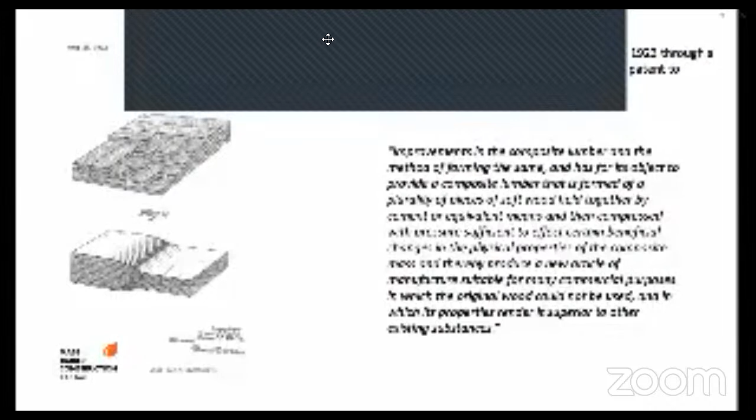But the earliest patent we've got is 1922 for this product called composite laminated timber or composite lumber. And it essentially is cross-laminated timber using smaller board pieces and compression systems to try and improve a composite of timber to make it have a higher capacity for two-way action, so that's the transverse and the longitudinal lamellas, and that then gives it its dimensional properties which are greater than a single board can give in, say, one orientation.

And so this patent is really the first semblance of mass timber, I guess, from Tacoma in Washington State in the US. But more importantly, now we define mass timber as being something more of a commercial element and part of the superstructure. And so mass timber really does replace wet pour concrete or reinforced concrete systems, and really forms the new age renewable technology superstructure.

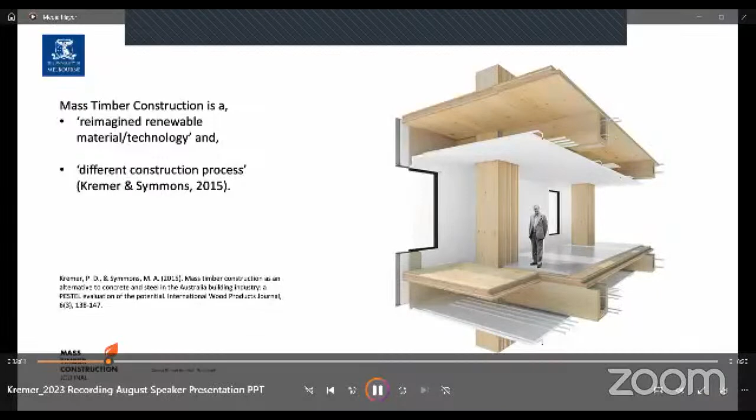And as you can see in this model here, the remainder of the building, whether it be the concrete screed on top of the CLT floor systems or the plasterboard ceilings that have a plenum area and look to have some sort of post-tension beam system running through them, and timber columns, this is representative of what mass timber looks like in modern technology.

And it's important to remember it's not just the material type, it's also the process. The process of prefabrication is what gives mass timber its competitive cost advantage and time and speed advantage edge. In terms of the material, its lightweight, its stiffness, and its strength capacity differential based on the dimensional depth of the material is another reason why you would use it. And it's lightweight. It's a quarter of the weight of, 20% of the weight of concrete.

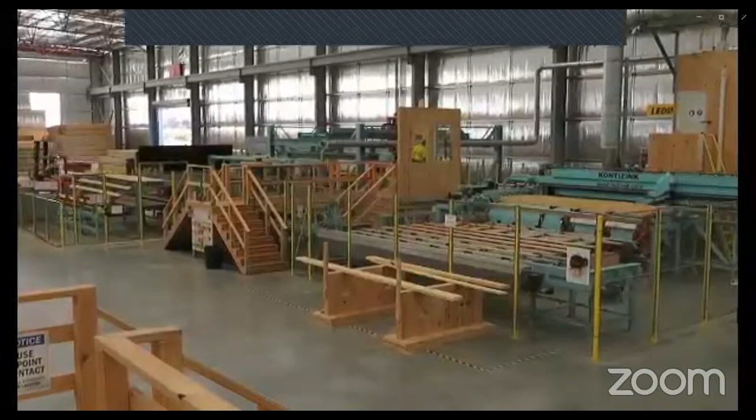So how is it made? Well, let's have a look at a short video and see exactly how it's made. This is a video of the XLAM factory, and I'm going to narrate or talk over the top for you. So this is the XLAM fully automated press, and what you'll actually see is the boards coming in. They're laid up on this like a deck to be able to allow the boards to get sorted into individual items, and they get tested for moisture control.

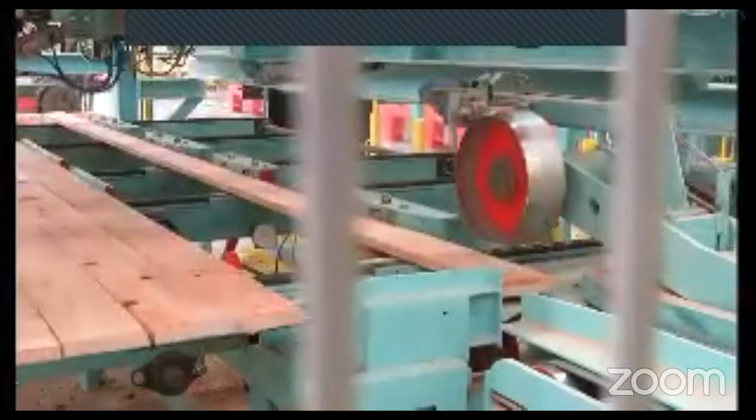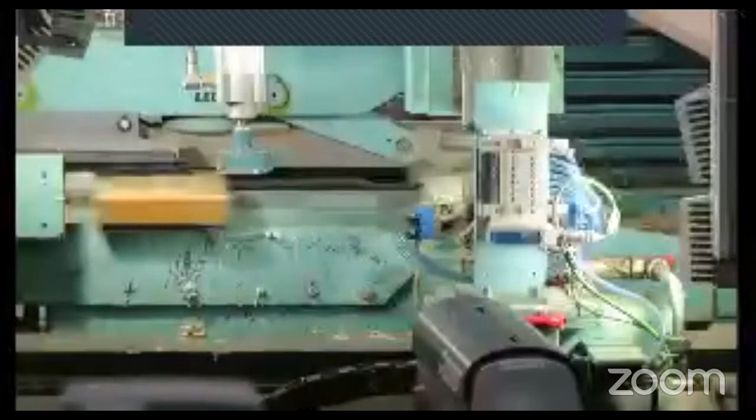So we want to make sure that we have the right moisture content in the boards to be able to allow them to go through the process without an issue. This is finger jointing one end of the boards so that we can actually create a continuous length, and the Kontizink here not only feeds the boards in continuously, it runs a finger joint through, and in a moment you'll see the glue being applied to the end of the finger joints right here. And that means that we're actually able to join continuously all the boards.

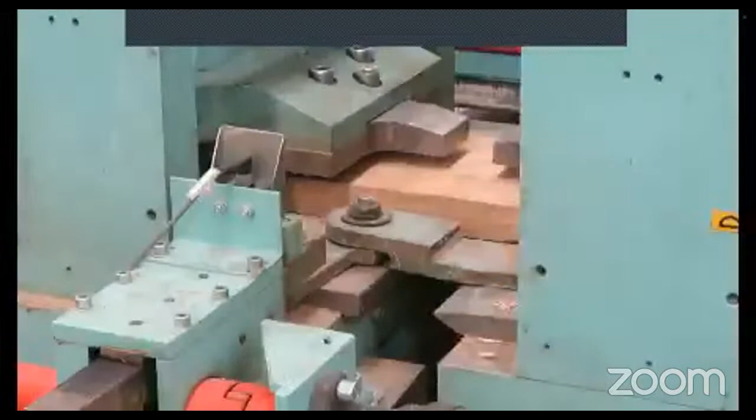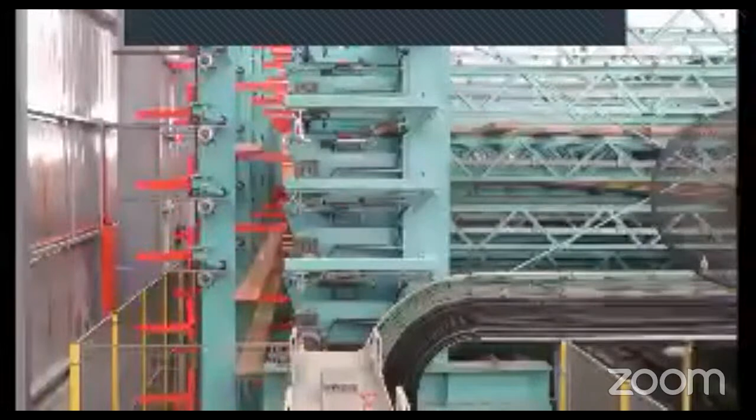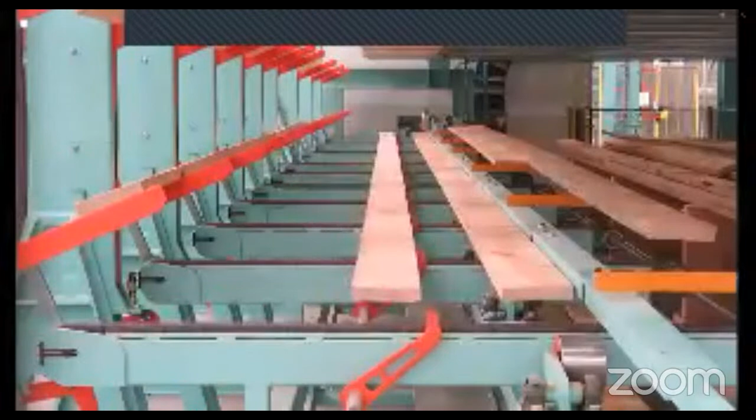Some will become long boards for the length of the billet, and some will become the cross boards, which is for the transverse lamella. It goes through the system until it has enough curing time for that glue, and then it will actually go into a planing and almost like a finishing type room to make sure that the dimensional depth and width is appropriate for the type of billet. So any variability in the boards effectively gets planed out and they get machined down to the right size.

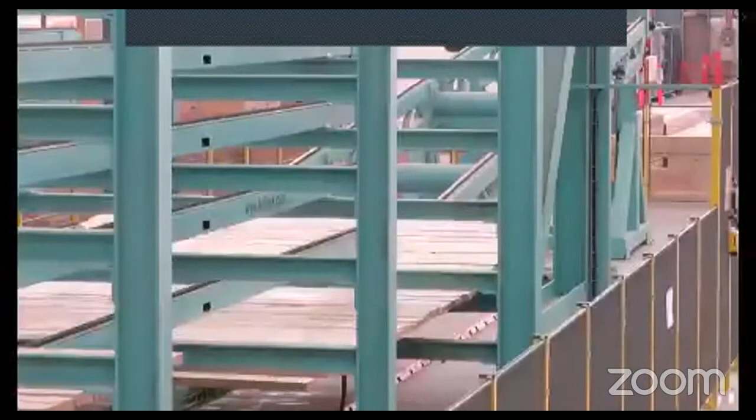Once they're machined, they get cut into lengths that are required for both that longitudinal and transverse. Here you can see the short boards, so these are the cross boards that are being loaded onto a conveyor system in an array so that they can get picked up by a vacuum lifter and put down onto the pressing bed, which is where they will be glued together before they end up in their final resting place in the press. The boards are now traversing along.

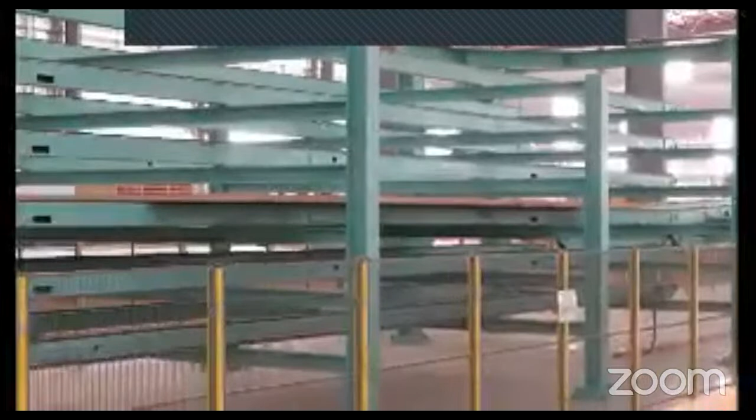The cross boards come down onto the bed, and you can see that happening here. These will go on top of longitudinal boards which already exist on the plastic tray. As you can see now, we've got the first set of boards being picked up. The white centerpiece is actually the bed that they will be laid down on.

And these vacuum lifters are very good at placing these boards on in a good way. The whole table now will move so that the glue can be put on it. Now the next layer comes on and it goes on top of it. And you're always going to have odd numbers of layers. Now it'll go back through the glue machine, which is where those purple lights are. You can see it here, the glue being applied.

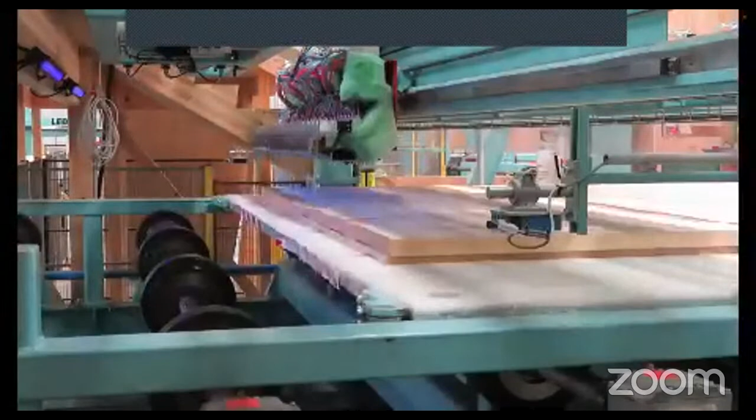And there's two boards on there, and they're two different thicknesses. And at the moment, the short boards are on the outside. So that tells me that this is a column orientation for this particular panel, not a floor plate. They then go into the press, and the press creates the pressure that's required to be able to make sure the panel stays together.

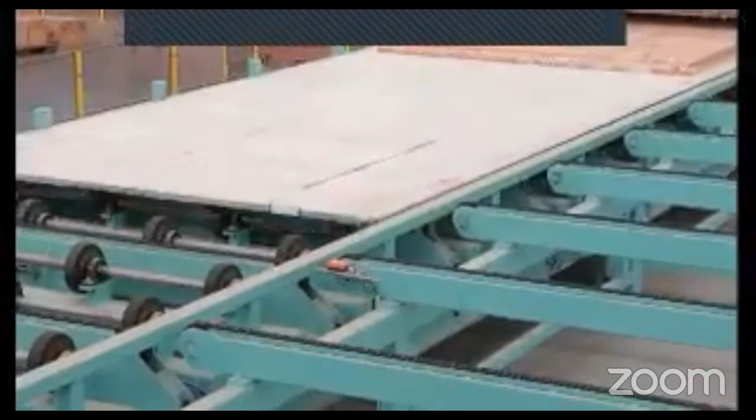And here it comes, the panel out of the press. So it's had its curing time. It cures outside the press, and it also cures under pressure in the press. And you can see the glue has foamed up now. That's because it's reacting with the moisture in the timber. So the moisture in the timber is required to be able to work efficiently to make the glue set off.

Here again, it goes into the press. This is the next billet, and it will now compress down and ensure that the whole billet comes out. And that's the end of the video for this particular bit.

Let's have a look at what it's like to have detailed design around those panels that you just saw being made. Now the first part is a digital design. To take that product that we've just produced into ordinary panels, we need to make sure we arrange them in the right way. You can arrange them through a number of different perspectives. So the first one is that you can use Revit to do an architectural space and place model.

But more often than not, Dlubal or Tekla are the next elements for the engineering analysis to make sure that we've got all of the right engineering properties for the building structure itself, to avoid catastrophic failure, to ensure diaphragm, to ensure we've got load transfers, etc. And all of that's done in Dlubal. We have this interoperability aspect where we can take what's called an IFC and change it from one program and put it into another program.

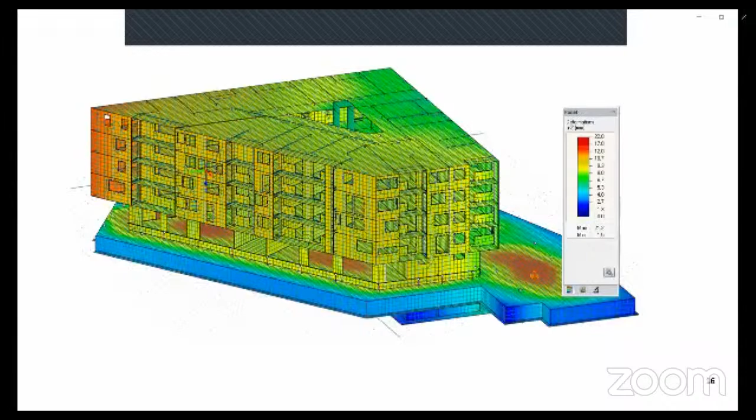And here you can see that there's deformation stresses being put on the building, and so the red is a higher level and the light green is a lower level. And the software is able to be interoperable, so we can take it from Revit Autodesk straight into Dlubal and then back into Revit Autodesk.

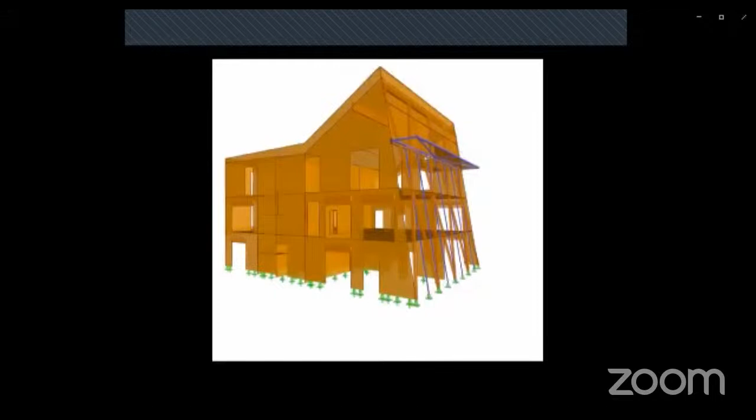And so to give you a practical example of how this comes together, we're going to look at this particular model. And this model here is of a building. I'd like to say thank you to Franco Piva because he's given me this model to use in this video. And I'm going to walk you through what the model looks like when we do a fly-through. And as you can see now, we're going through the building, looking at all the individual elements. And now we've come out the other side and we've transformed the digital version into an actual building.

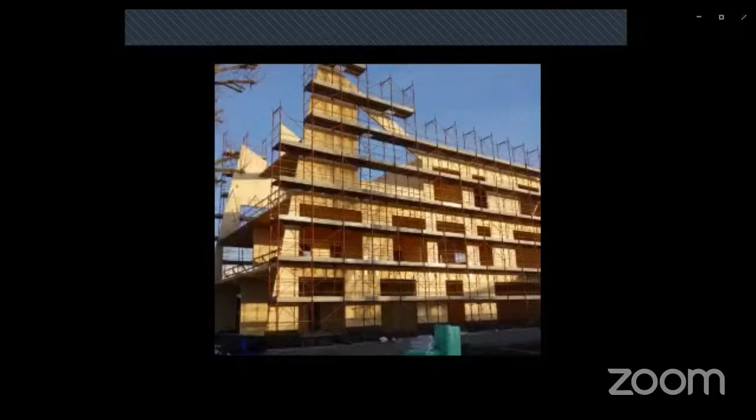And if we take those same fly-throughs with this particular building, you can see that where we had a digital technology telling us where to place the panels, those panels have now ended up on site, and that building is coming together in almost an identical way to what it was in its digital space. And you can see the final building before the cladding and the lining goes on. And here you can see the final building with the cladding going on and the windows going in.

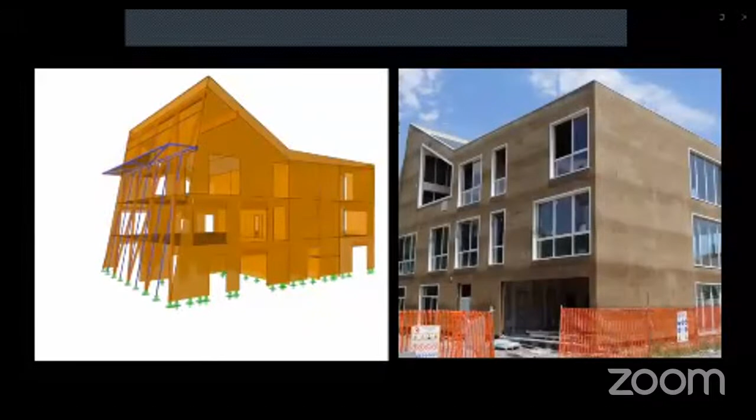And if we look at them side by side, you can see that the building looks remarkably like the digital model that we had prior to that. So it's really important to know these digital models really are the genesis for where the technology is placed when it comes to understanding how mass timber buildings come together.

And so mass timber systems can get used in very different types of buildings. And one of the buildings is in Spokane in Washington State in the US. And it's the Catalyst building, which was actually done by Katerra before Katerra unfortunately left the planet. The Catalyst building has a Revit model here.

Again, we start with that Revit model to see exactly where the place and space for all the panels will go. And then we work into more sort of detailed orientations for each of the panels that we produced. As you saw in the factory at XLAM, each of those panels has a location in a digital model.

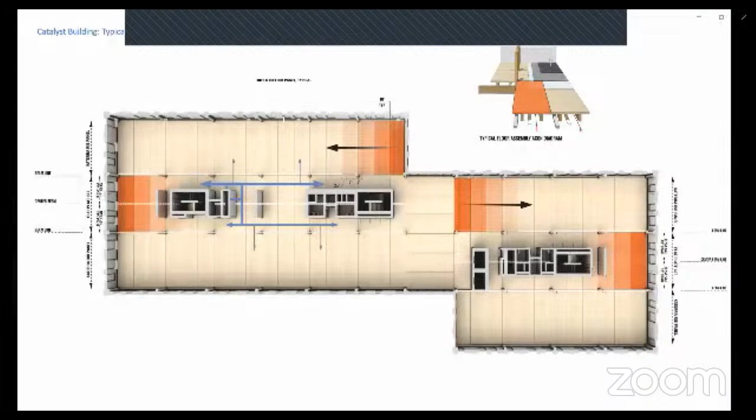That digital model then allows us to make the panels appropriate for the type of floor system or the type of wall structure system or column system. Once we have that detailed design, we can actually then do what's called a shop drawing list. The shop drawing list lists all the panels that we need to make, and this is what's sent to the factory to produce those different types of panels that you saw being produced in the video.

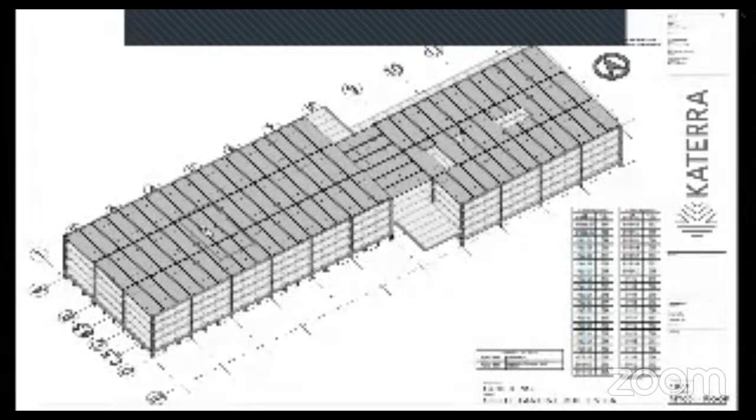And we make each one of those and we put them together in digital space. And here's that digital space. This is the column and beam structure in the green and the yellow at the top. And then we have what's called the intermediaries, which is this orangey red that's sitting in here. And so that model gives us the structural skeleton of the building, which we can then go and lay the panels onto. Now, the panels might be CLT panels, or they might be a hybrid cassette system.

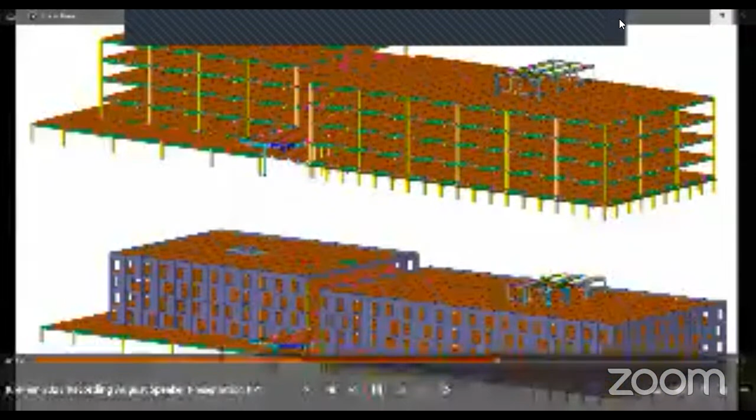And the columns may be steel, but they may be a higher grade glue laminated timber technology. And in most of these buildings, and in particular this building, the green beams are actually GLT beams, glue laminated timber beams. Once we have the whole superstructure together, you can see these purple panels. These are the facade. So this is a modular facade system which chased up the building, which means that when the building levels went up, so did the modular system. And all of that's produced in a factory.

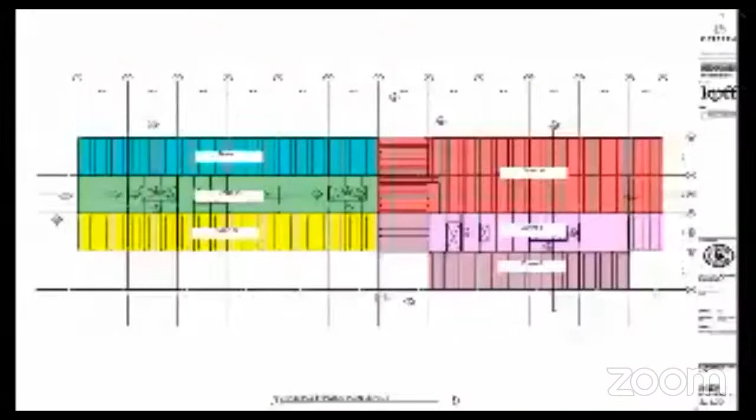And as you can see here, I mentioned before that there were glue laminated beams. Well, this also has a CLT lift core. These stair cores in the center of the Catalyst building are also CLT. Generally, you find that that's often concrete because regulations in locations like the US and Australia and Europe often don't allow that to happen unless there's a really good fire suppressing system and a building regulatory certifier that's comfortable with having CLT or mass timber cores.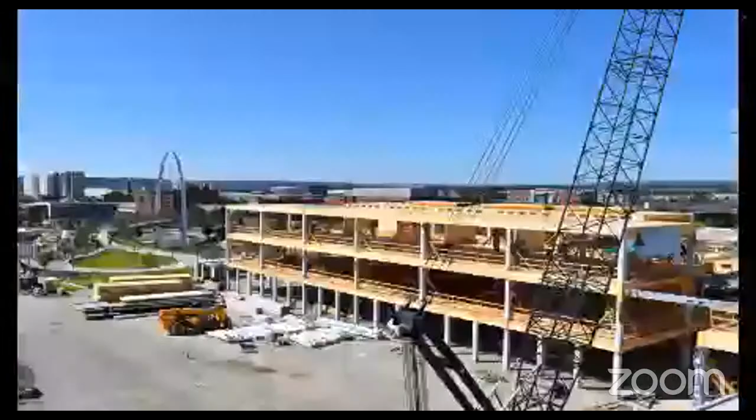It's an impressive building. And here's some under construction shots. And you may have seen these types of shots around. There's a lot of these photographs around looking at this building because it has these massive beams and these intermediary ribs and wonderful columns, and the entire building just looks amazing. Again, some more great shots with the facade system, and you'll see the facade system's actually CLT as well, and some more construction shots from a distance.

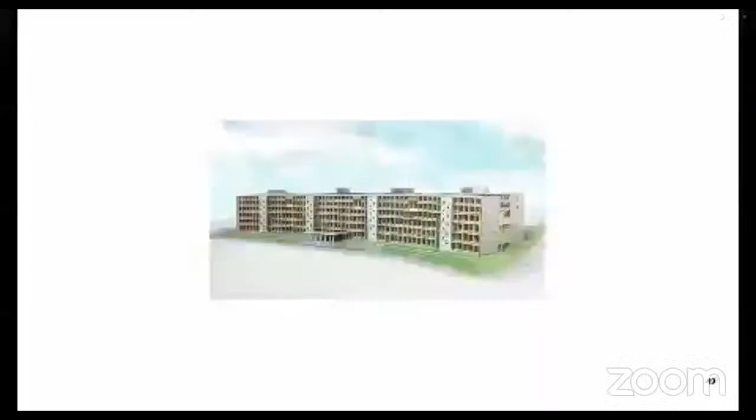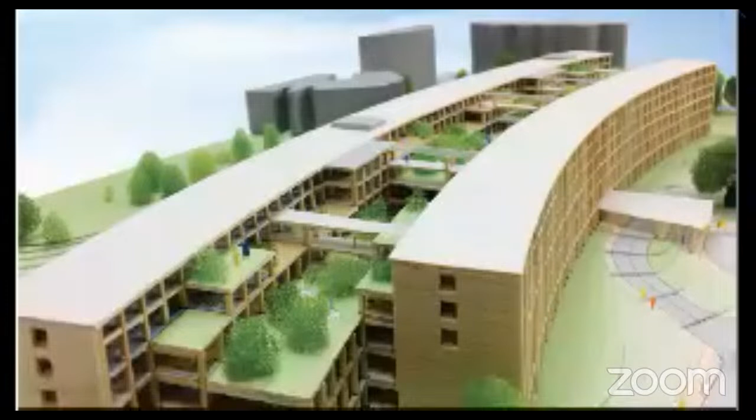This is the wooden model that was produced to verify the location and the placing of the building, and another angle is given here. Again, the systems are very large. They're these very large connection systems with amazing glulam beams and these hidden connections like Pitzl connections. And so Toyo Ito, who was the gentleman who worked on the design, had these very concealed fixing systems, and these were the size of those systems that went into the NTU.

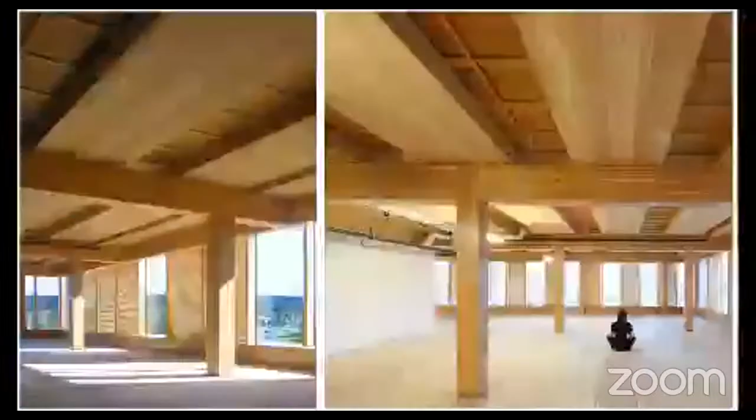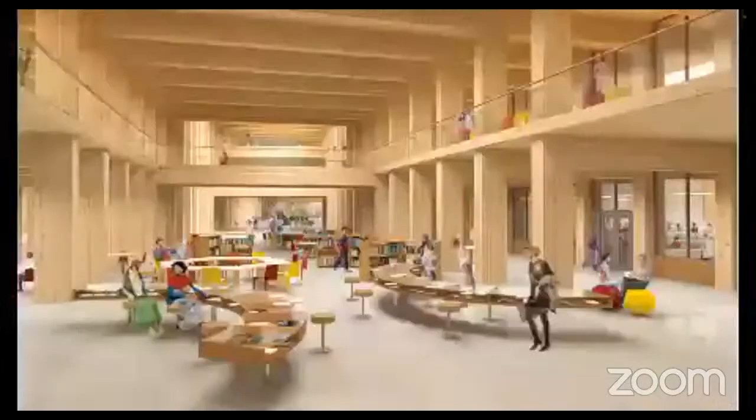And as you can see in the Catalyst building, they've used something very similar. This is using material that is in the Katerra building that you saw previously, but it follows a very similar unique design in the NTU building, and this is from the NTU building. So this building is now open, so if you do get a chance to go to Singapore and have a look at the NTU building, you will not be disappointed at all.

It's an impressive building. So that's my quick run through in sort of 20 minutes of the mass timber production, all the way from how we get the boards to be put through the machines to be able to then go into a press, and then how that panel is then situated in a digital technology, and then how that is configured to go to site. So I've actually given you from the board or the tree all the way through to the completed project in a very, very short walkthrough.

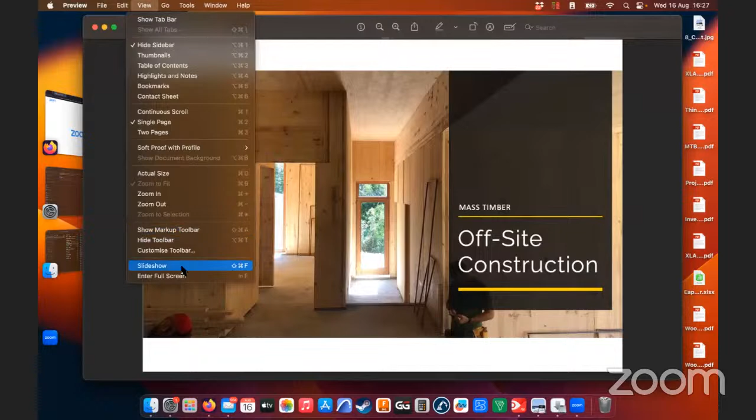Thank you. Thank you very much. Thanks for having me. I'm just going to share my screen to show our presentation. Can you see the presentation? Hello? Yes, we can. Yes, we can. Okay, that's great. I thought I was on my own for a second.

Yes, we can see. So yeah, we are a manufacturer in Cape Town, South Africa. We've been operating for about 5 years now. When we started manufacturing cross-laminated timber, we were the only manufacturer in the market. In fact, there wasn't really a market here. There were a few European companies who were trying to export stuff to South Africa and a few buildings that had gone up, but nothing that was really in an affordable range, and quite difficult to manage those projects over such a far distance.

It is possible, they do it quite often in Europe, but the market here wasn't really something that they were focusing at. So I did a trip around Europe and visited a few of the factories there, and I must say that they were very helpful and friendly in helping us to get the information that we needed. And then we decided to start manufacturing.

So my background is in architecture. I was an architect, so I did have an understanding of what the market required. And I had also managed a furniture manufacturing facility, a timber furniture manufacturing facility. So I kind of already was in the pathway for that. We initially started by building our own press.

So let's take a look through the slides that we have here. We, from the beginning, wanted to make sure that there were certain elements covered. And because we were first to market and the first manufacturer, there's a lot of hurdles or barriers to entry. The biggest barrier was the standards.

So I'm sure Nigeria has its own specific building standards and recognizes certain materials. South Africa has SABS or the SANS standards. And to build with materials which aren't in those standards is quite challenging. You get a lot of issues during your submissions to council and for approvals. So it's difficult to get it through. So the first stage that we saw was to tackle that standards. And to get a national standard in place is not an easy task.

And we actually helped one of the universities here, one of the big universities here, to push it through. There was also some backing by certain government organizations. The Department of Trade and Industry in South Africa had already identified mass timber and engineered timber as an important product, which would increase the forestry sector, which makes up 1% of our GDP.

So with the university and with these parastatal or state organizations, we managed to push the standards and get something in quite quickly. So quickly is 3 years, but we still did get something in. So South Africa now has a national standard, which is actually a copy of the Canadian and American standard. It's a clone of that.

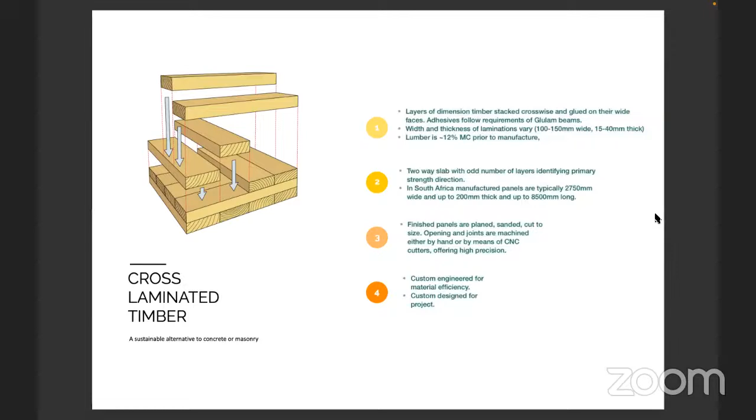There's a whole range of mass timber products: glue laminated timber, dowel laminated, LVL, parallel strand, nail laminated, all of the different ones. We specifically have focused on cross laminated timber. It is very similar to glue laminated timber in its production process up until the actual pressing. So there is the possibility to do both of these, but we specifically have just decided to focus on the cross laminated timber.

Again, this is just the standards. We had the standards in place. We got the fire certificates and testing done, and we have structural testing done. So we had to cover all of those bases with the materials. And in any new environment, these are the key things that you have to do. You have to identify the timber and start getting these standards in place. We did manufacture before we had standards, and we actually built quite a few buildings before there was a standard in place, but it just makes it that much easier once there is a standard and it is a recognized material.

Mass timber has huge potential for solving a lot of problems that are found in the construction industry. And it's not all about the timber itself, it's what the timber can do in its system. Because you are manufacturing in a factory, and to different levels in a factory, you could do just the panels, you could do full build-ups with the cladding on it, or, as we have done before, entire modular buildings which are then transported to site. So that allows you to increase your construction speed quite considerably. The material is kind of a finished material as it is. It is a structural material.

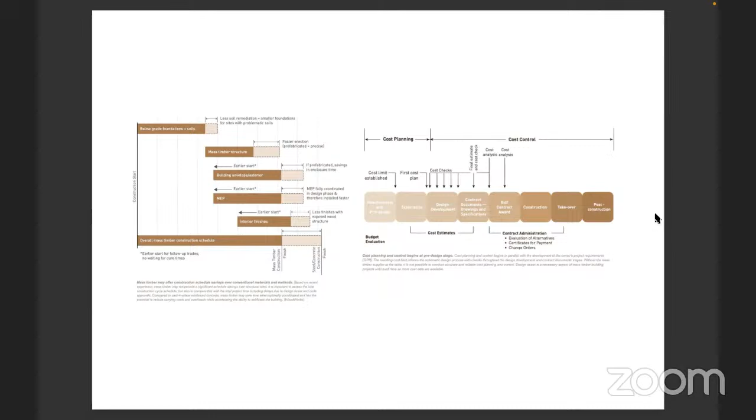So it's quite important to have that level of detail, LOD stages in a project, and to be able to look at those. Project must be frozen before it goes to the manufacturing. You don't want to start making changes while panels are in a factory.

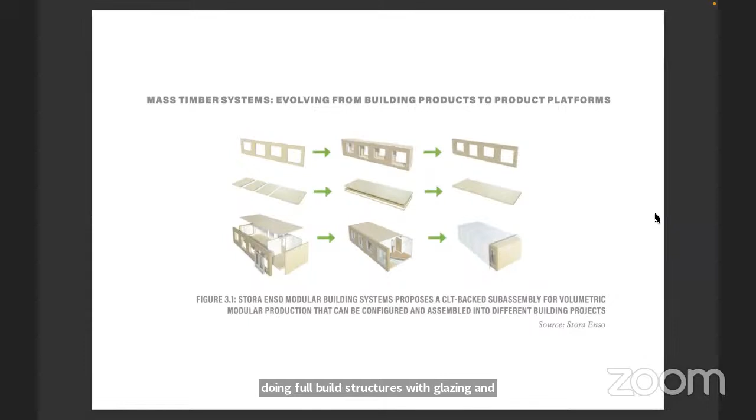Then there's different levels of development that a building could come from. This is a detail from Stora Enso showing different ways that they would do it. You can have just flat panels or panels with cutouts. These could be made up into composites, which are, say, a cross-laminated timber wall with the cladding on top of it, or to the level where you're doing full build structures with glazing and electrics and plumbing and everything incorporated. And that's kind of what you're doing in the factory at that level, you're screwing these things together and building components to different levels.

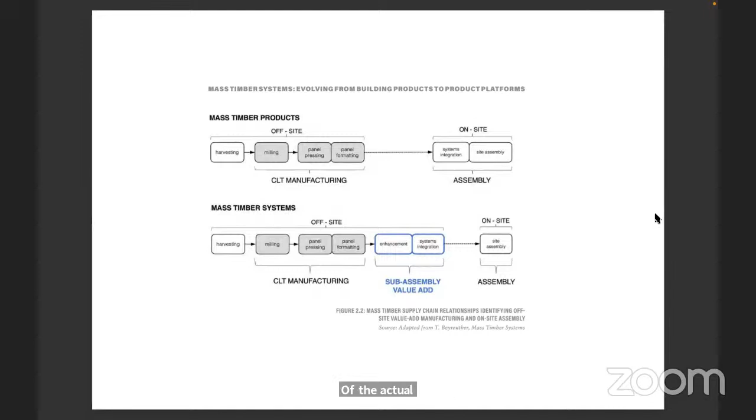So the explanation of how cross-laminated timber is made was very good in the previous presentation. I don't think we need to go too deep into that. This is just showing the different levels of the actual manufacturing. You can just be a CLT manufacturer and not do the sub-assembly value-added portion, but it does help. It's a great add-on to be able to have.

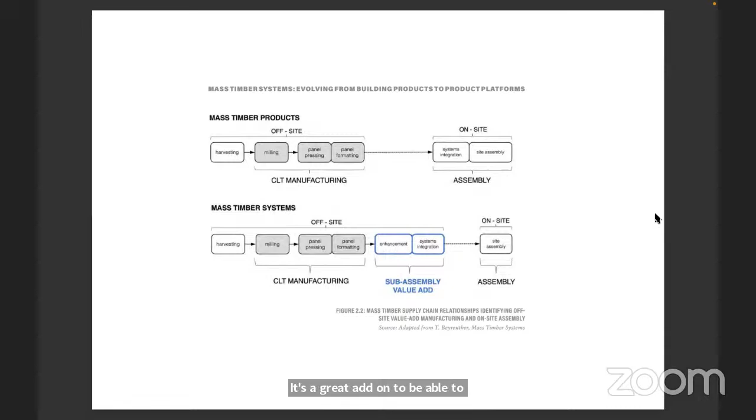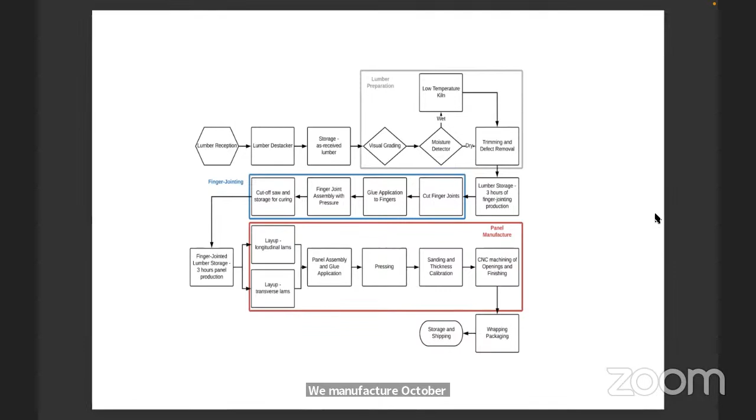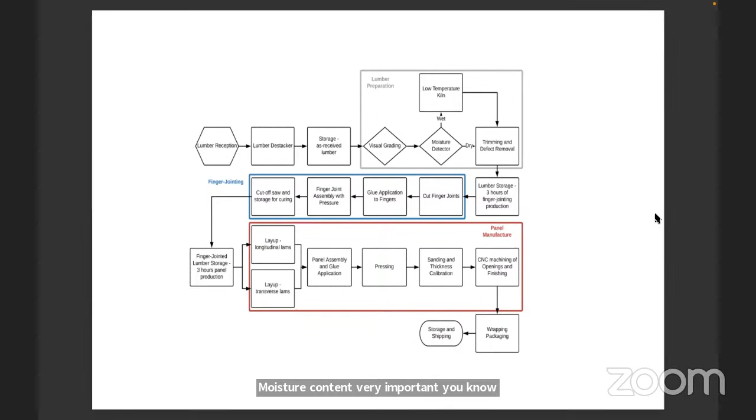This is just a basic run through to show the different processes that are involved in manufacturing cross-laminated timber. The moisture content is one of the key issues with the timber. We manufacture our timber from pre-graded structural timber, so it already is graded as a structural timber before it arrives in our factory. There is the possibility to do that within the factory. Moisture content, very important. You have to do equilibrium of moisture for your factory, and then also keep in mind where it's going to go in the end.

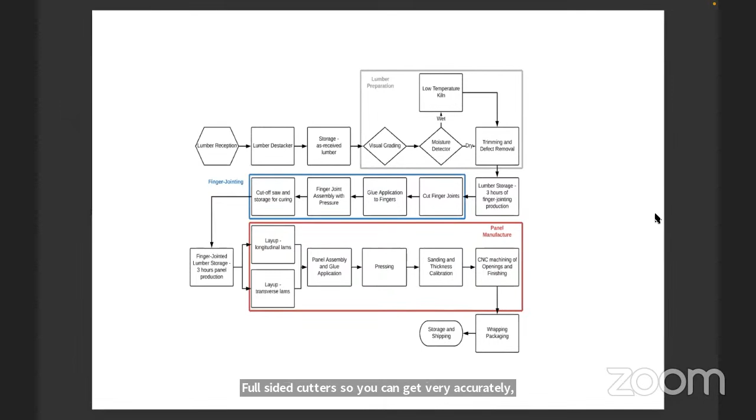The main components of a factory, I would say, is your finger jointing operation, where you are taking planks and extending them. Then there's cutting them to length. Then you would do your molding, typically, where you're putting the planks through four-sided cutters, so you can get very accurately planed all around timber. Then you can do your layups with glue and pressing.

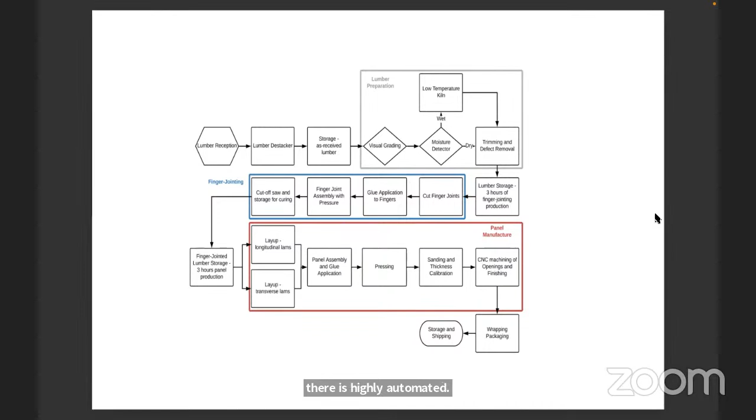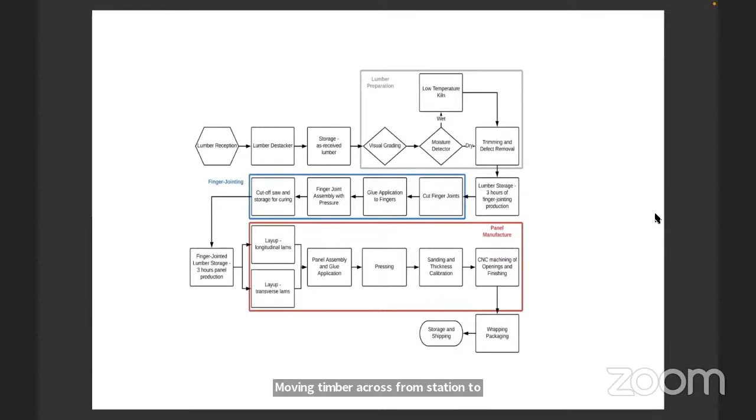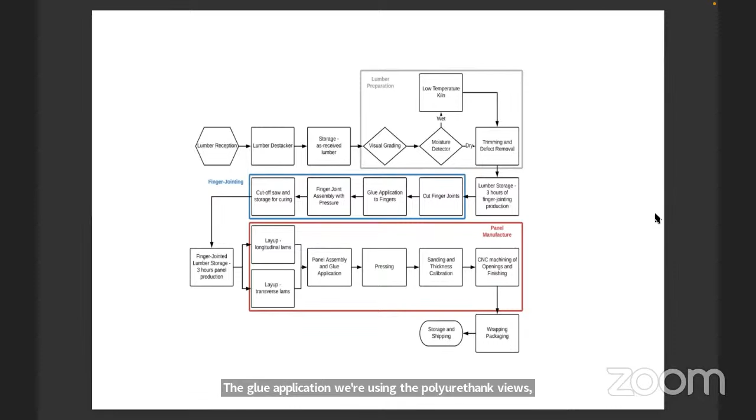So in the previous presentation, you saw that the factory there is highly automated. Our factory has almost no automation. We are hands-on manual the whole way through the process. We've got 15 people in the factory. It's a lot of manual labor, moving timber across from station to station. The layup itself is done by hand. The glue application, we're using the polyurethane glues, but we have a gantry system that is moved through a small motor rather than a fully automated gantry system.

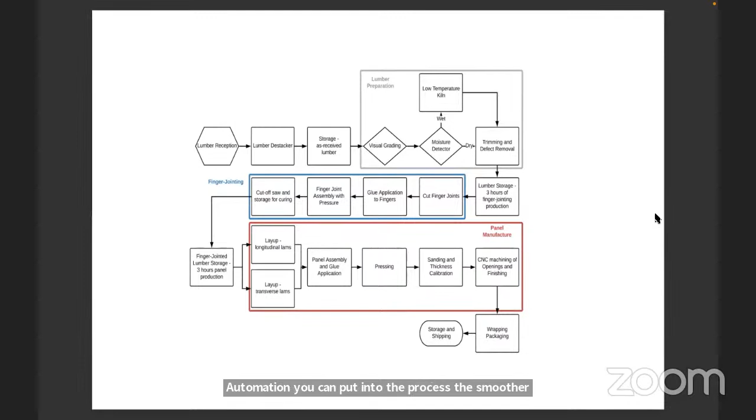So there are ways to find easier entries into the market. The more technology and testing and automation you can put into the process, the smoother it's going to become. So our operation takes a lot of hands-on, eyes-on to make sure that the product is coming out the way that it should. So I'm not saying that having no automation is the right thing. I would think that having more automation is the better thing to do, but you can build up to that automation.

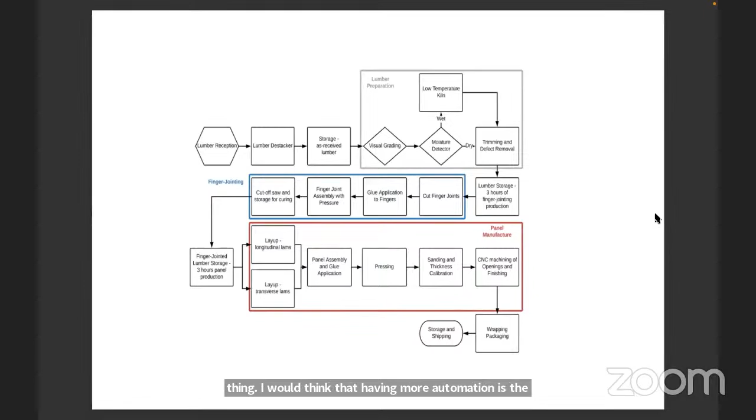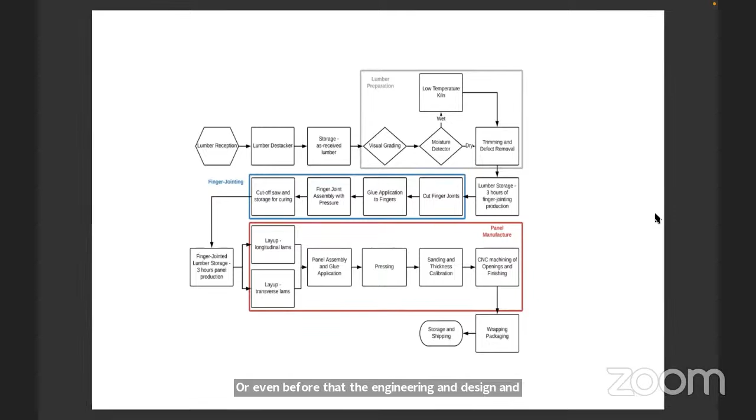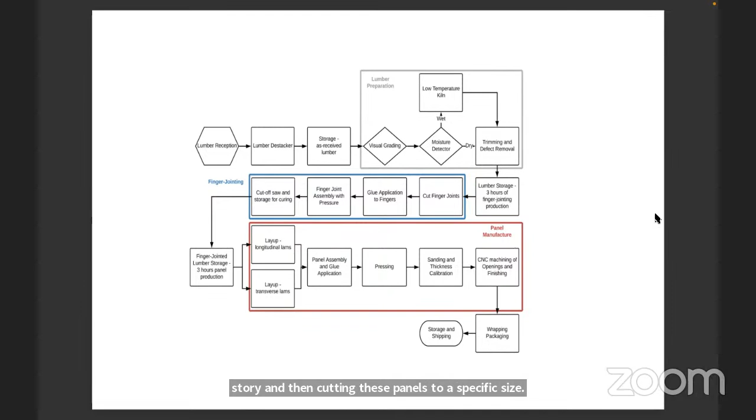The one component which is essential is the cutting. Making CLT is one story, or even before that, the engineering and design and drawing and preparing the packages for manufacturing is one story. Manufacturing of the actual panels is another story. And then cutting these panels to a specific size is a big story. We initially started by cutting panels by hand. We had big circular saws and routers, and I can tell you that it's not a good option. For the size and the weight of these panels, you need some form of automation and some sort of mechanical cutting system in that operation.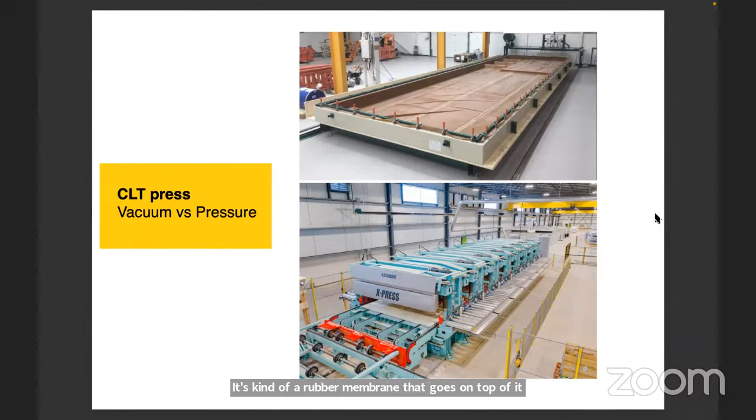Cutting of the panels, we have opted for an industrial robot. So there's two systems that you could use for this. The one is a large CNC gantry system, and the other is an industrial robot. So the large CNC gantry system is essentially what it says. It's just a supersized CNC with very big motors and tooling on it.

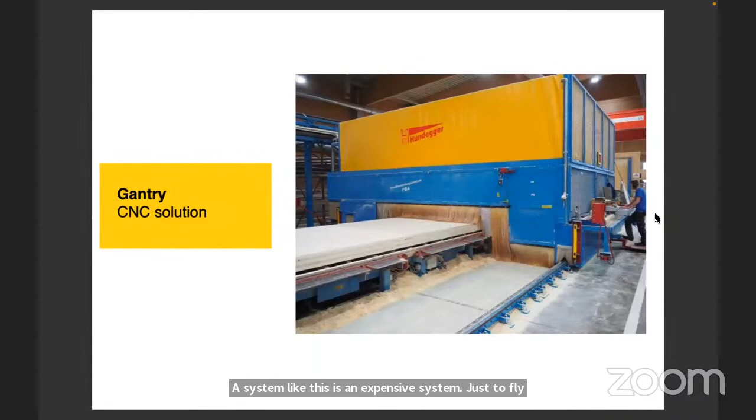This kind of is almost a fully automated system. You can put the drawings and the panels in there and cut exactly to the sizes that you need. A system like this is an expensive system, justifiably so. It's a very high-tech system. The option that we have gone for is of an industrial robot. These are the type of robots that are used in car factories and are a lot more accessible. There are quite a lot of them around, and the second-hand version is very good.

This is our robot. We actually purchased it from a BMW factory. The robot system does take a lot more input from our side, but we luckily have had help from Autodesk in programming these robots. So we use this with an automated sliding track to be able to cut our panels to lengths and to sizes and to do the detailing. And we use a circular saw and a large router. So we can do probably 70% of what a large automated CNC could do.

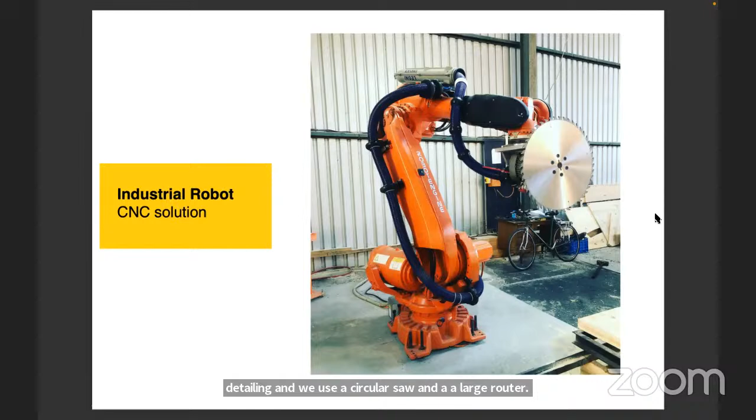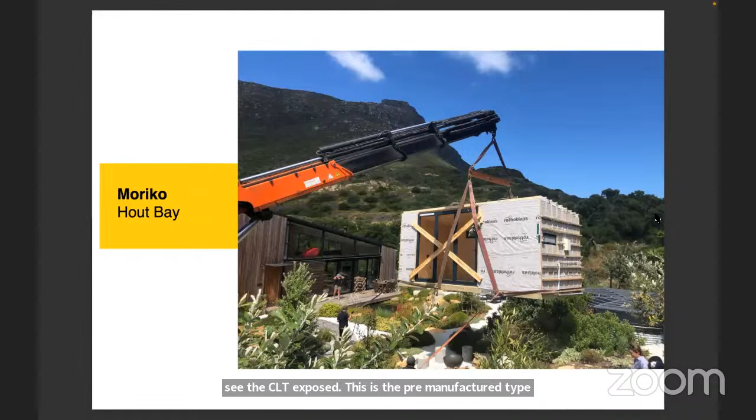This is the pre-manufactured type of units. These things were built in the factory, glazing, electrics, plumbing, everything incorporated and then lifted into place. That's kind of one of those units. It's kind of limited to the size of the unit that you can transport. So it does need to be a modular system if you're going for larger sizes. But there you can see the fully exposed CLT internally. Like I did say, it is a structural material, but you can make it look great if you put a bit of extra time into it.

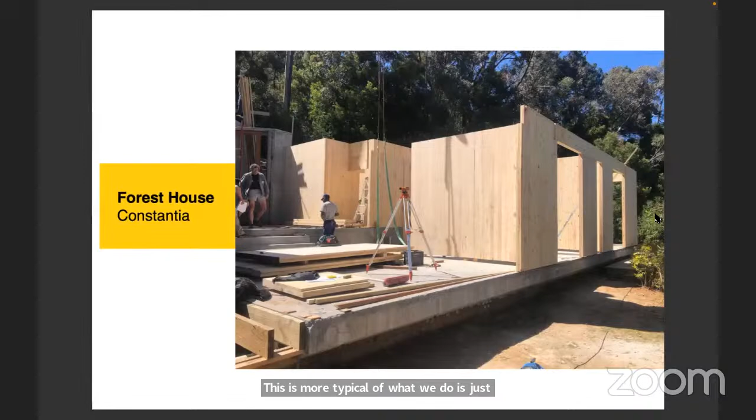This is more typical of what we do, just panels for houses. They arrive as flat panels and are assembled on site. This is another project. So you can see even with the machinery that we have, we can manage to make panels up to 200 mil thick. With our press system, we do an 8 meter by 2.7 meter panel. We are planning on building a larger press, so you can get 14 meter panels. But again, transport is a big deciding factor of the size of press that you would need.

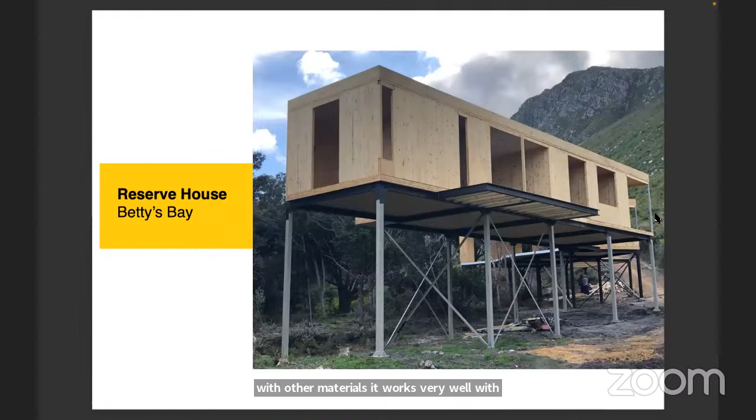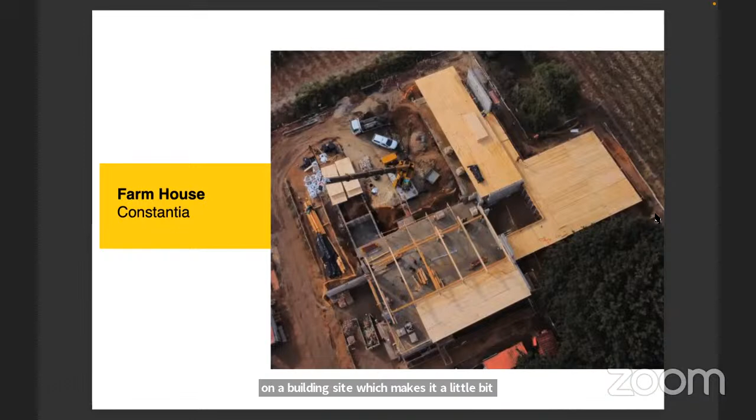Lightweight, it does allow it to be combined with other materials. It works very well with steel. The accuracy in the steel and the timber complement each other. And then even large scale, we do a lot of floor panels. I think it's an African situation where the cost of labor is low here. So it is not that expensive to get people doing brick work on a building site, which makes it a little bit difficult to compete with that type of material. But for reinforced concrete slabs, we are very, very competitive. That's that same project from the internal. You can see this is incorporated with glulam beams and CLT panels.

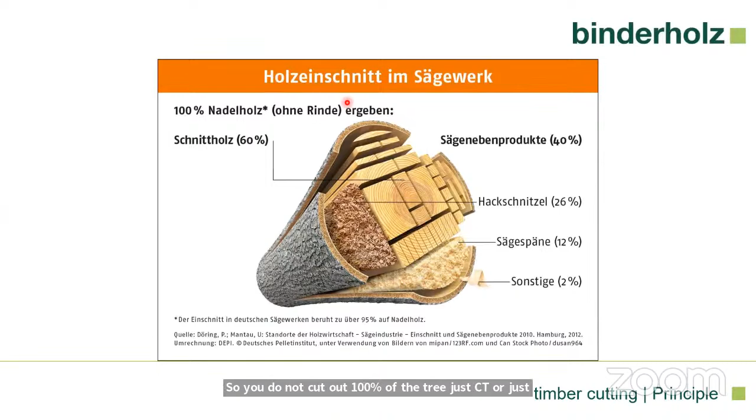As we can see here on the picture, let me check if I get a laser pointer, CLT would typically be one of those boards, and glulam one of those boards, depending a little on the section. So you do not cut 100% of a tree into just CLT or just glulam. And that's also how our company is structured: to use 100% of the raw material.

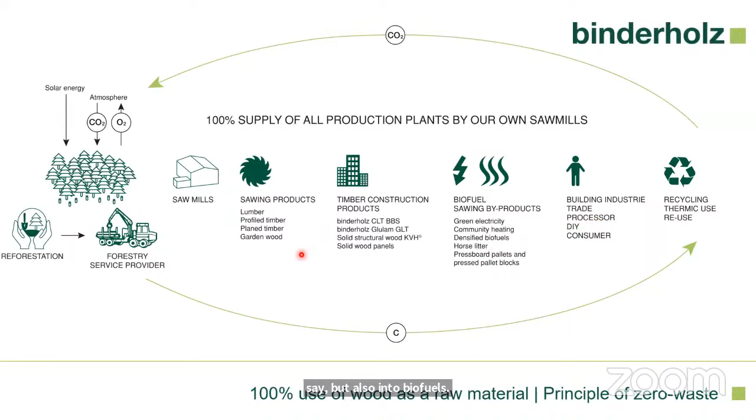We start directly, I will go into more detail later, with forestry service, reforestation and harvesting. Then we go into the sawmills, sawn products, and timber construction products, the most interesting part of this webinar, but also into biofuels and pallets, for example. This brings me to the division you've seen in the tree: not 100% of the tree is structural timber.

And this brings me to the different pillars that we have. We start with a tree nursery. We have our own forest management. Then you have basic products, which are just lumber. Then you have DIY products, construction solutions, and also biofuels and pallets.

Brings me to the numbers. 50 million trees we are setting each year. And we are producing around 5.2 million cubic of lumber, which means between 7 and 8 million cubic of trees cut down. And as we heard already before, the important thing to understand is that it's not only CLT, because if I take this 5.2 million lumber and take the glulam numbers and the CLT numbers, we are at 600,000 cubic, let's say. Let's round it up, it's 10% of our business.

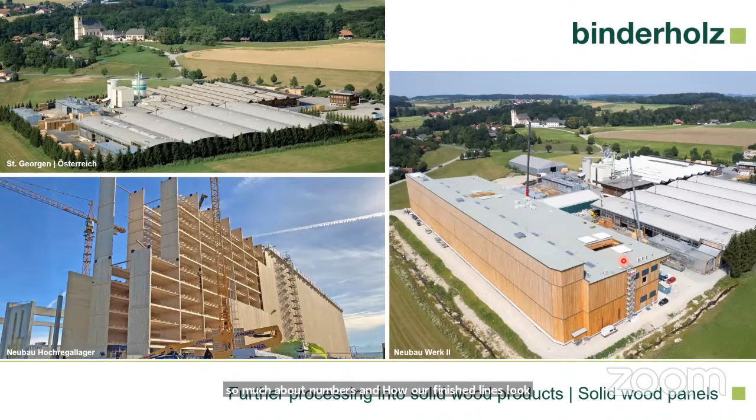I think it's important to understand, if we go into the topic of how to process trees to get engineered timber products out of them, the better the input is, the better the output is, and that's relevant for the whole chain of processing the tree. So the better I'm able to control, or let's say diversify my products through the chain, the better I have each single product ready for me to use.

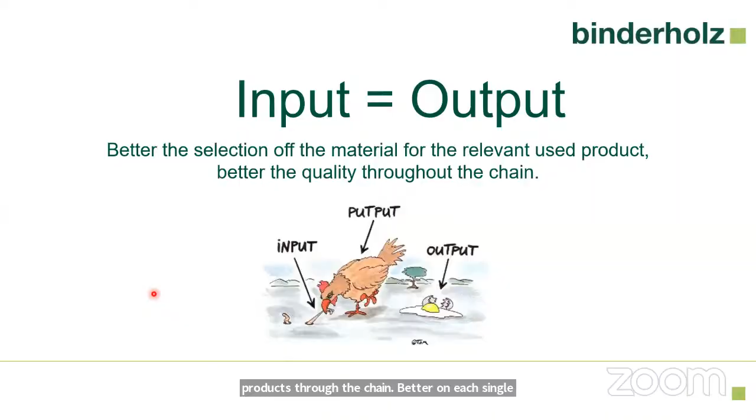Thanks for the attention. I know it was quite short, but otherwise I would talk a third time about CLT production, and we already had 2 good presentations about it. So I think it's not worth seeing the CLT production a third time.